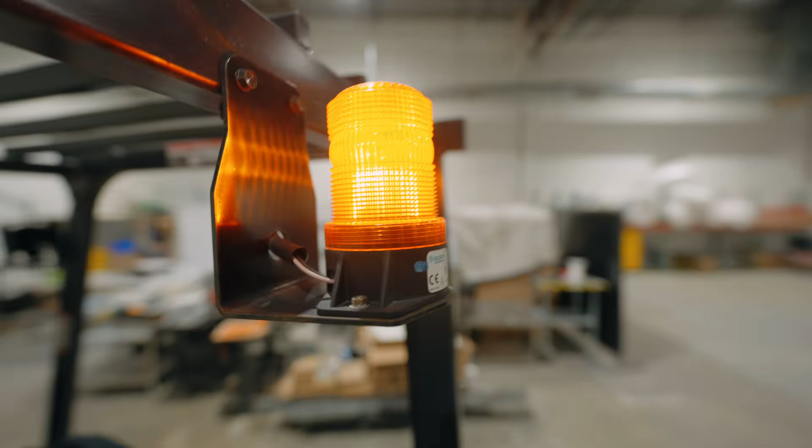I know you really want me to tell you what's in the box. Don't worry, we do have something big to show you.

But before we get into it, I want to give you some updates about our company that I've never shared publicly before. I'm proud to say Formlabs is the largest professional 3D printing company founded since the 1980s. Our revenues have surpassed $250 million per year, and we're one of the only companies in the space that is both rapidly growing and profitable.

More importantly, our customers use their printers a lot. They have printed more than 500 million parts. They also love our products. We have a Net Promoter Score of 60, which means they recommend Formlabs at a similar rate as companies like Apple and Tesla.

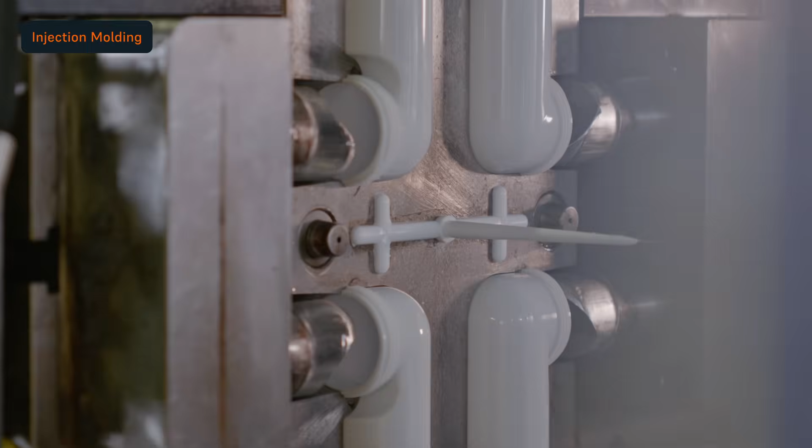Formlabs' mission is to build the tools that make it possible for anyone to bring their ideas to life. But we need even more powerful tools that can match your ability to imagine products. Injection molding is incredible. It can produce amazing parts with great surface finish and detail, excellent materials, and at very low cost at volume.

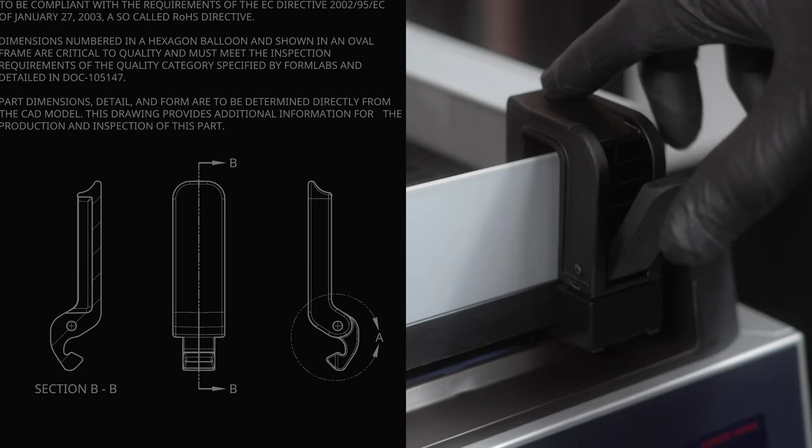But anyone who has tried to make something with injection molding knows that it also really sucks. Consider the humble Form 4 mixer latch. It took us 3 months of tooling iterations and thousands of dollars to produce. Why? There must be a better way.

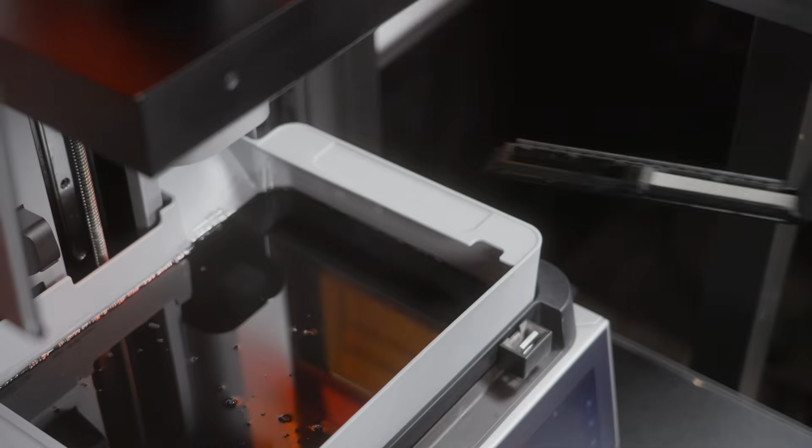We made progress on fixing this with SLA. It's now cost competitive, up to around 10,000 parts, while maintaining the ability to quickly iterate on your design. And we've closed the gap considerably on materials.

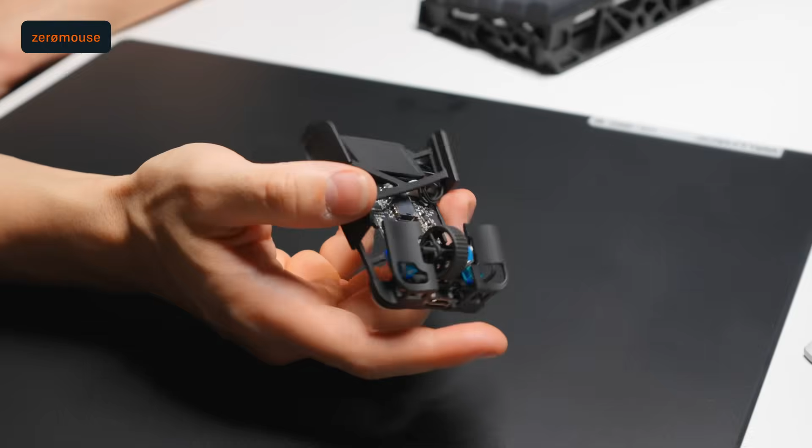Take Ali Syed, an amazing product designer who's using Tough 2000 resin for his lightweight gaming mouse to boost durability and performance. He's printed thousands of this design and shipped them around the world. Our latest generation Tough resins have made a huge leap. Usage has more than doubled already in just a few months.

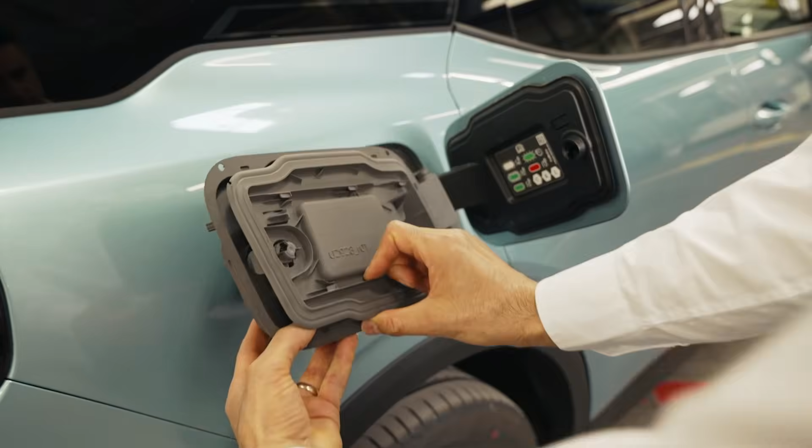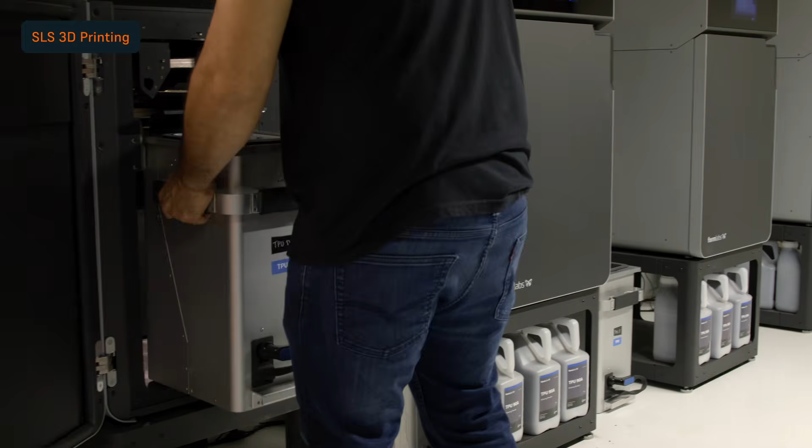All of that changes today. Now let's see what's in the box.

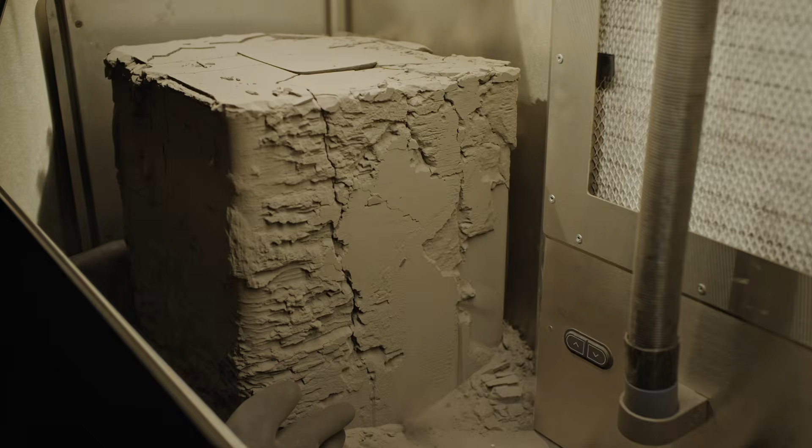I am incredibly excited to tell you more about our new SLS printer, the Fuse X1. Starting your first job on an industrial printer is usually a multi-day affair.

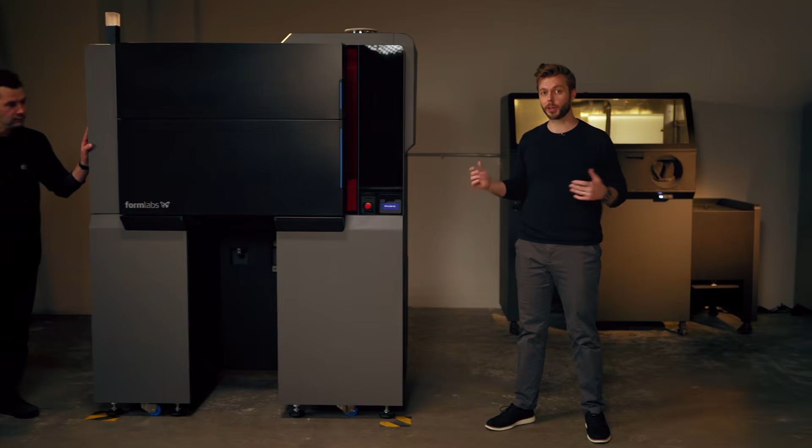30 minutes ago, the Fuse X1 was in a crate. Now it's unpacked and wired, and in just 15 minutes, Peter will have it ready for its first print. He's rolled it through the door and into position, and he'll start with raising and leveling the printer.

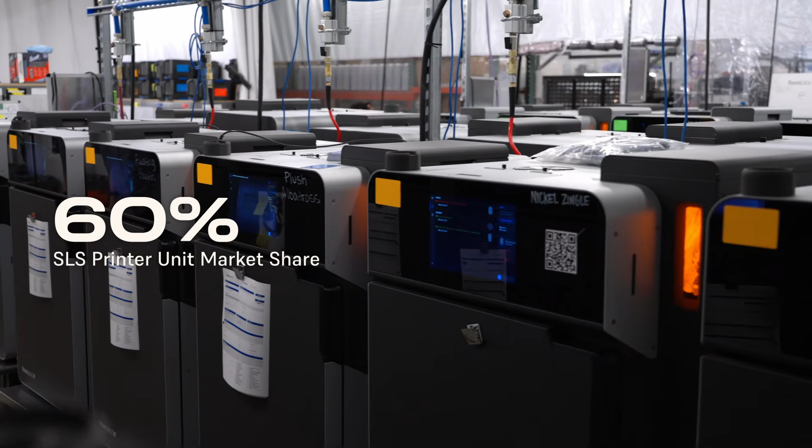Now, let's back up a little bit. The Fuse One series was our first foray into SLS, and it dominates the market today in units sold. But our thousands of successful customers have one consistent request: make it bigger. And today, we've delivered, and so much more.

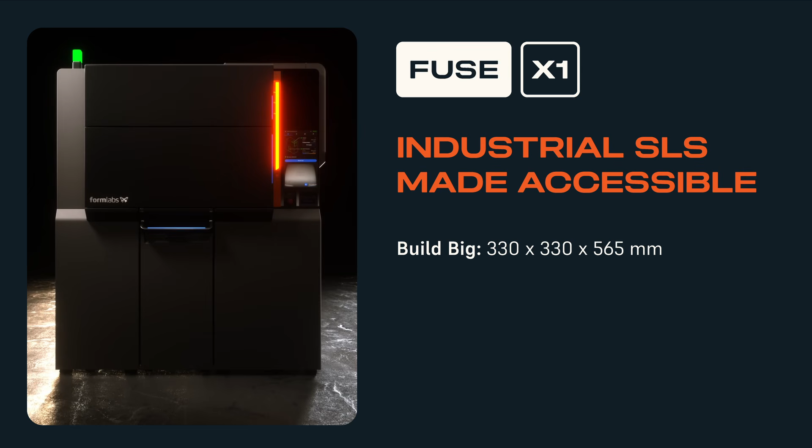We've gone way beyond big. The X1's build volume is huge. It delivers the lowest part cost in the industry. It redefines productivity. It's intuitive, like any Formlabs product, and extraordinarily reliable.

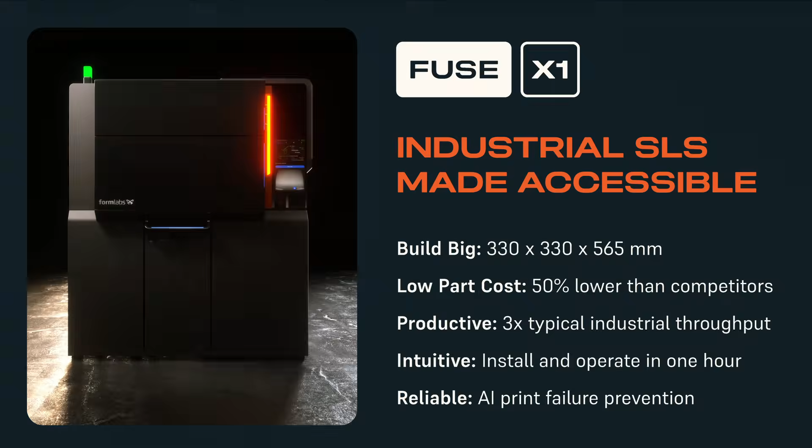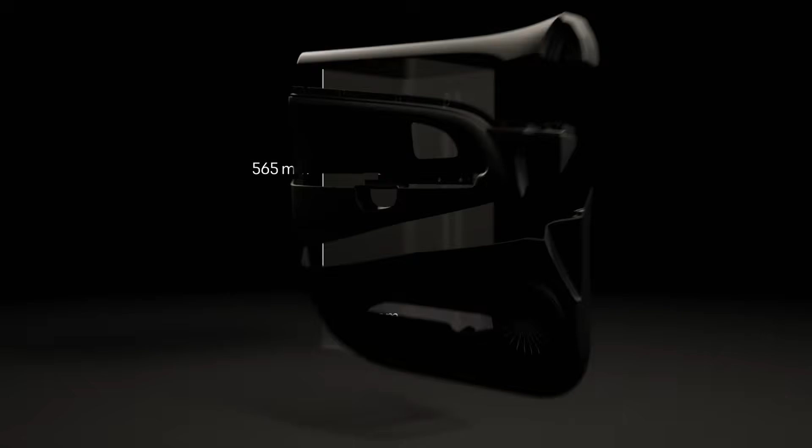Let's talk big. Support-free printing lets you take full advantage of the Fuse X1's massive build volume. That means you can print large, full-scale parts in a build volume nearly 8 times larger than the Fuse One Plus, and dense production batches in the thousands. Let me give you a few examples.

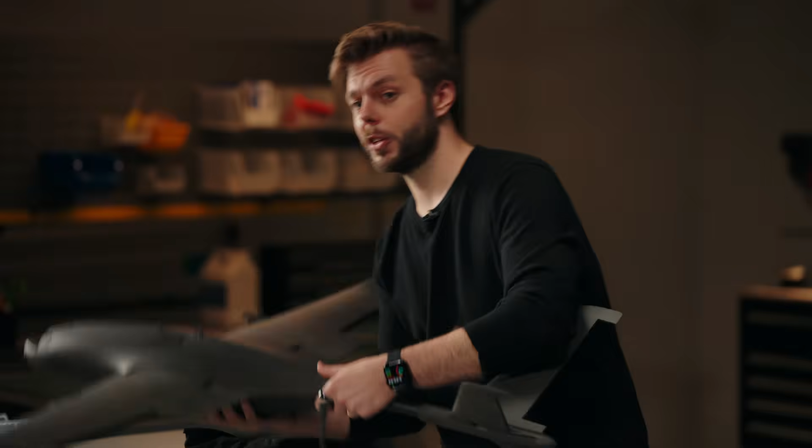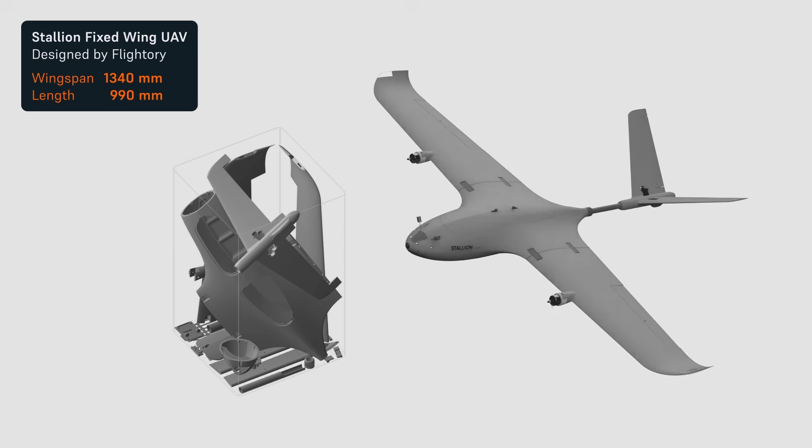Take this huge fixed-wing drone. On any other printer, this would have taken 5 or 6 builds. On the Fuse X1, just one. A 1.34 meter wingspan and every part required can be packed and printed in a single build in less than 24 hours. Same goes for this massive intake manifold.

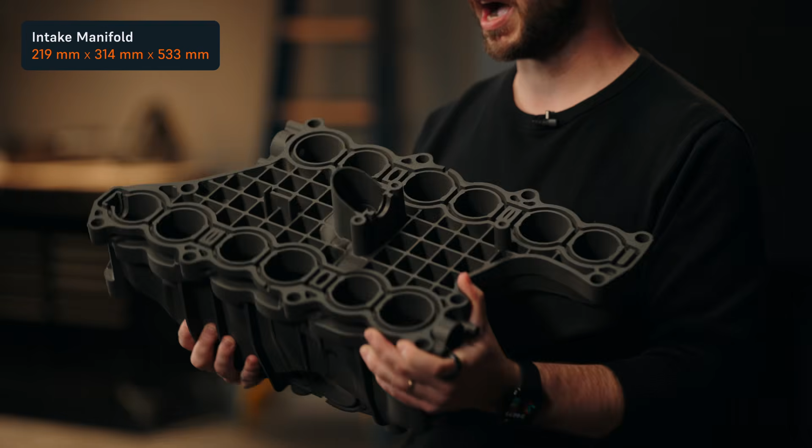The Fuse X1's ability to produce exceptionally high quality, dimensionally accurate parts like these is why Radio Flyer chose it to develop their latest e-bike.

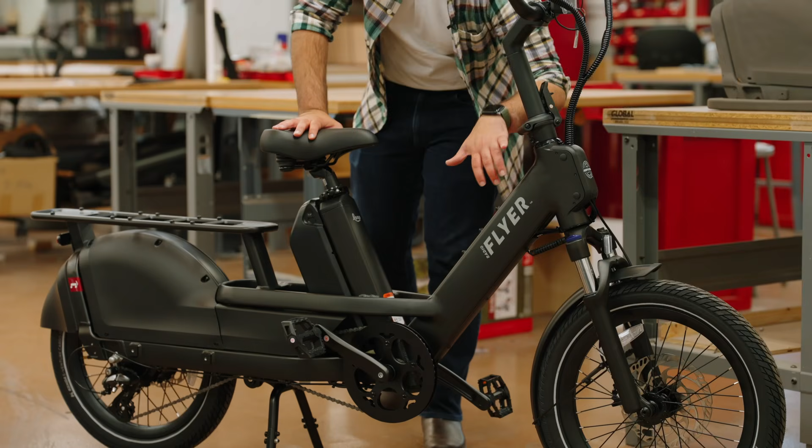The Loop cargo bike is the most approachable, compact cargo bike for families. Our frame is totally custom, our accessories are totally custom, and very intentionally designed. Going back a couple of years, we would have built a full cargo bike with a welded metal frame and then clad it with printed parts.

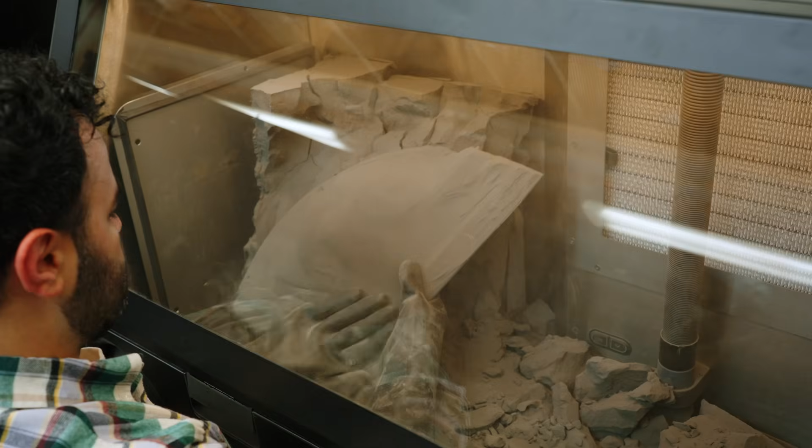We might split it up into about 19 different builds for something like the Loop. That whole process could have taken us 1 to 2 months. With Fuse X1, we could print an entire Loop cargo bike overnight and be gluing it together the next day. So we went from 2 months to a couple of days. I can iterate 3 times as often with 9 times less labor. That's a super appealing value proposition.

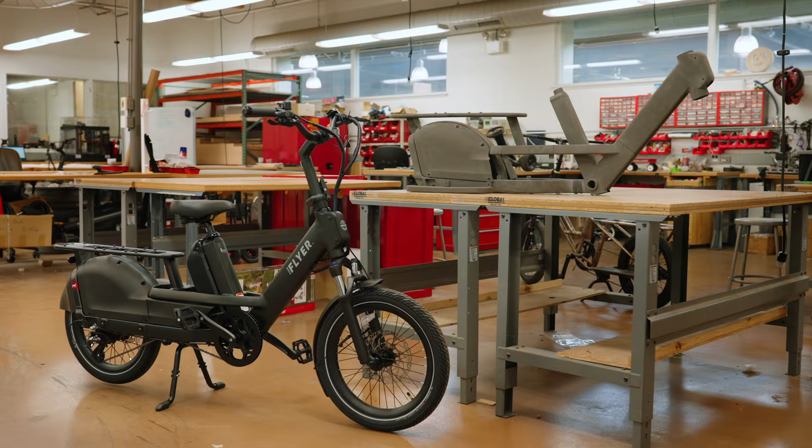Radio Flyer has gone from waiting days or weeks to iterating overnight. They're now shipping more products to market faster than ever thanks to the Fuse X1.

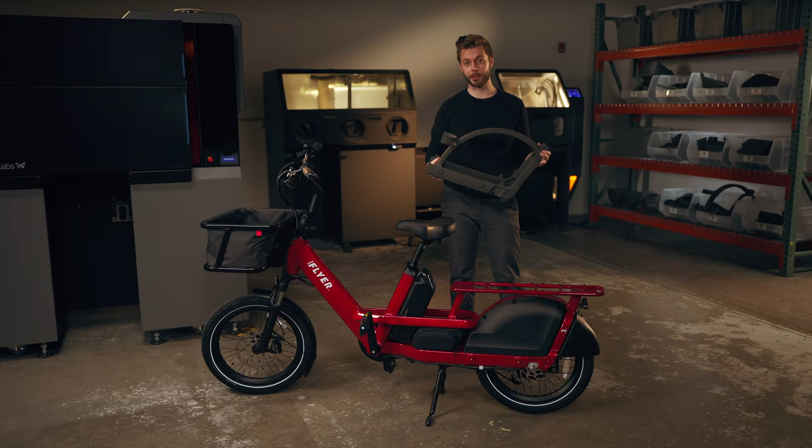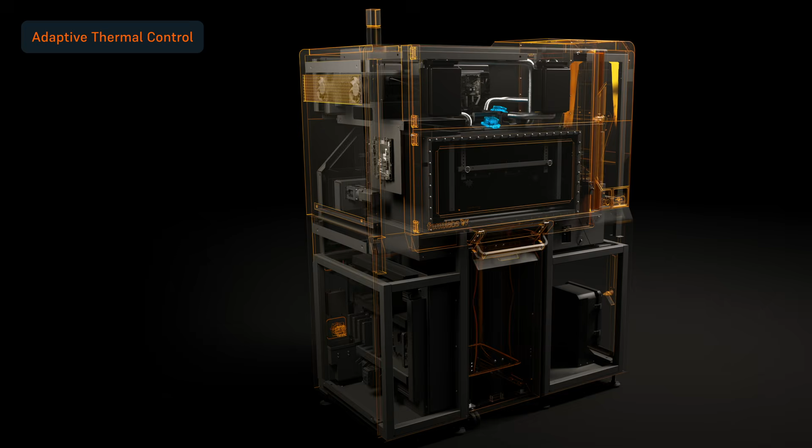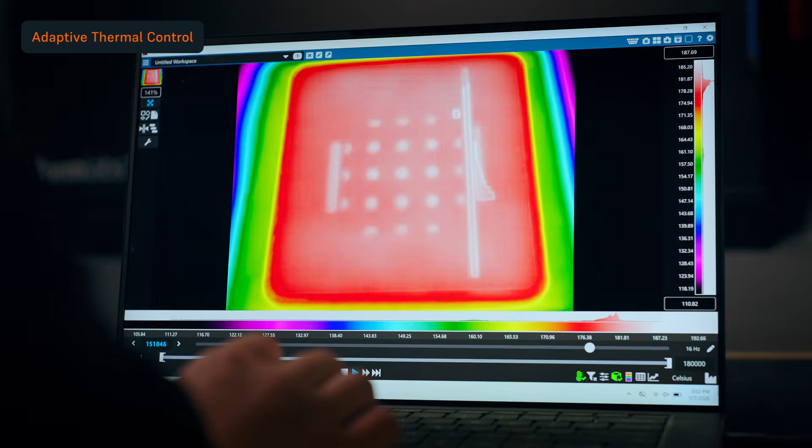But a larger printer doesn't just mean big parts fast. The Fuse X1 sets a new benchmark for productivity. It can reliably print builds so dense that legacy systems will outright fail or produce unusable parts. We achieve this with a technology called adaptive thermal control. With 13 independent thermal zones using 700 times more thermal data than the Fuse One Plus, the Fuse X1 delivers, maintains, and sinters powder at an incredibly stable temperature, giving you unlimited freedom and exceptional part quality.

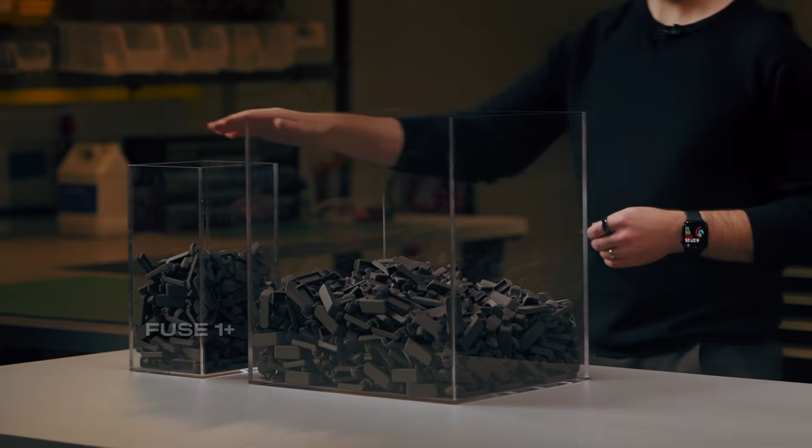Take this Form 4 mixer latch. In a Fuse One Plus, I can fit about 300 in a build. On a legacy industrial printer, about 800. But the X1, it can reliably fit over 3,000 in a single job and 10,000 in a single week.

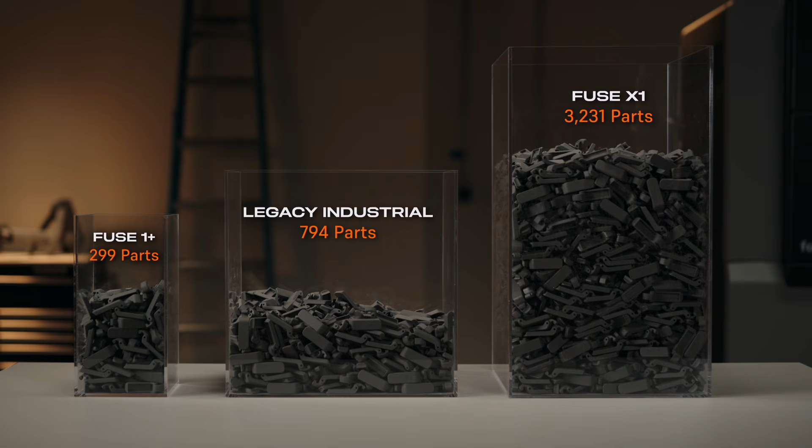As you can see, the X1's build volume is not only larger, but thanks to adaptive thermal control, we can also pack parts closer together and without restrictions on the orientation or the placement in the build. That means you have nearly unlimited packing density.

Productivity like this is changing how the world's most advanced companies develop products and solve problems. And if there's one company that you can count on to push the boundaries of manufacturing, it's Tesla.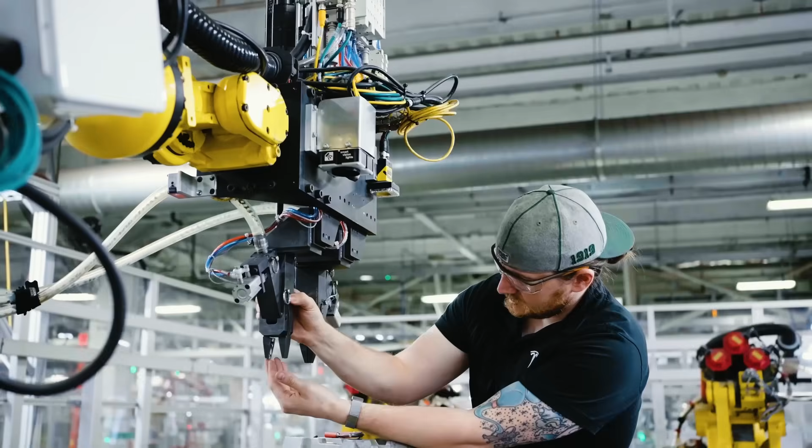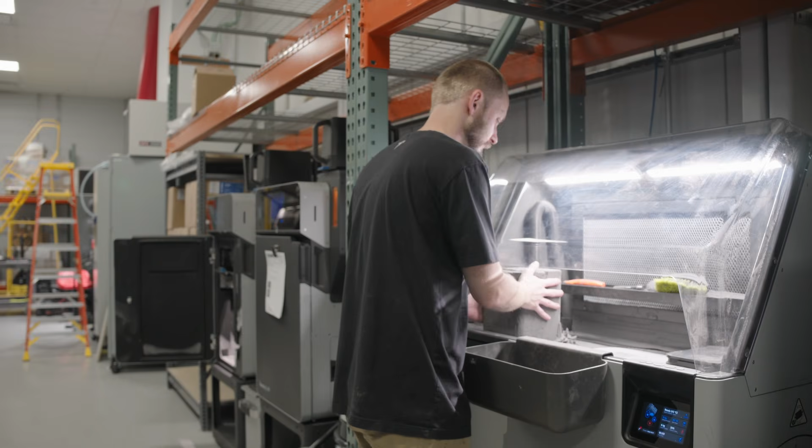Here at Tesla, we make progress on new projects faster than seems possible. We set impossible deadlines and then somehow meet them. Having in-house additive allows us to print a part, test it, break it, find out what's wrong, print it again with a new design over and over until we get it right.

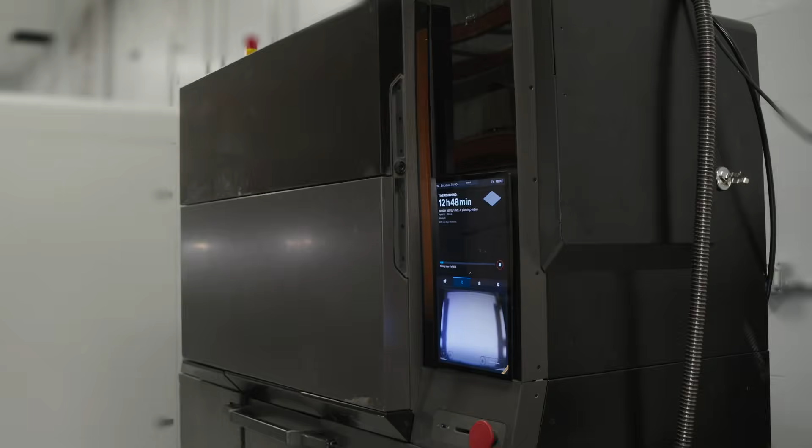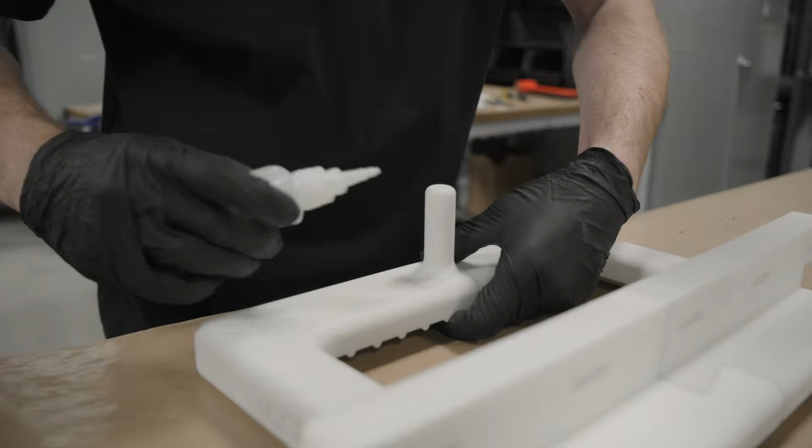So due to the print speed, the Fuse X1 allows us to use the entire build volume within that 24-hour build cadence, which effectively doubles the volume compared to our legacy SLS printers. And then on top of that, the reduction in manual labor.

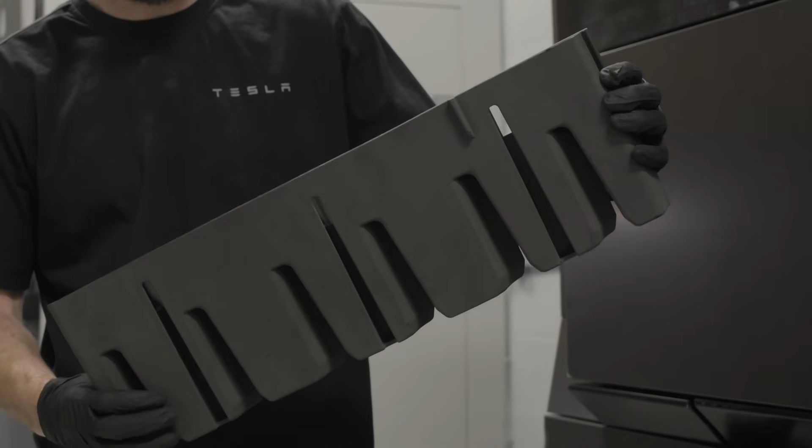Fuse X1 really allows us to run high mix builds with starkly contrasting geometry. So you can have one very large part surrounded by a bunch of little parts with minimal or no impact to the quality of the parts coming out at a very high packing density.

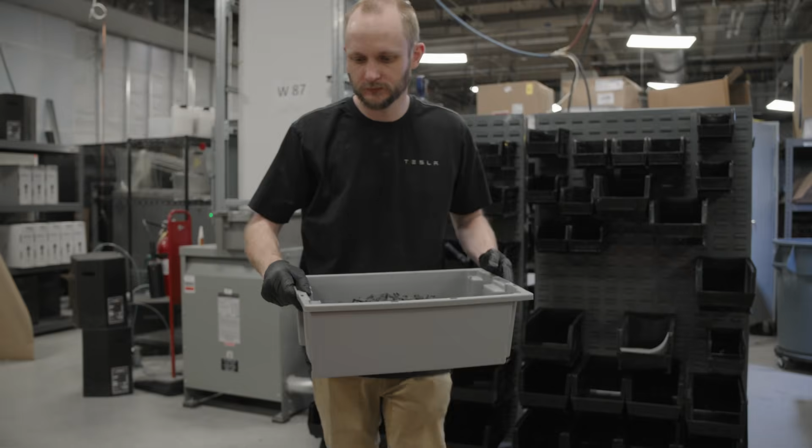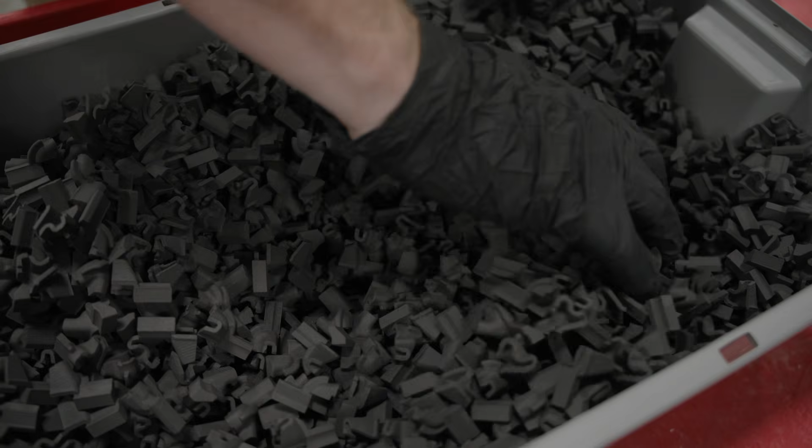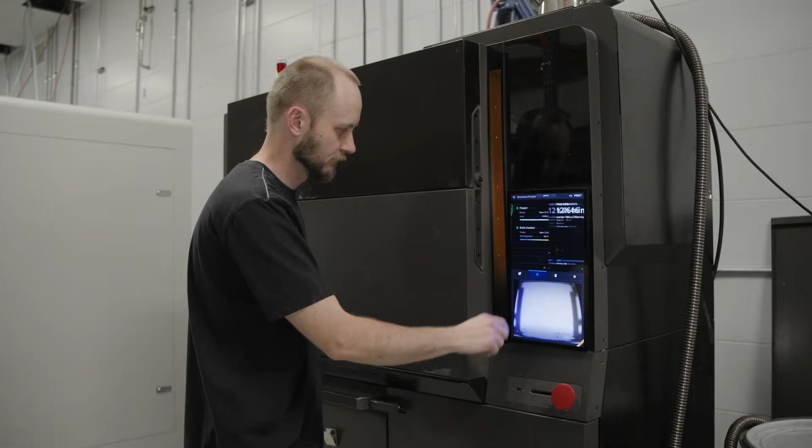With this non-marring shim, we had looked into injection molding and had found that with the SLS systems, the cost per part was competitive enough that getting a mold made really didn't make sense, even though we are going through 10 to 20,000 of these a month. Yet with the increased throughput and decreased cost, it has completely changed our perspective on what kinds of projects our lab can support versus what we would have traditionally moved to an injection mold.

Throughput only matters if the parts are usable. The Fuse X1 consistently produces exceptional parts, more reliably than any SLS printer on the market, thanks to our new AI-powered print failure prevention system, Print Intelligence.

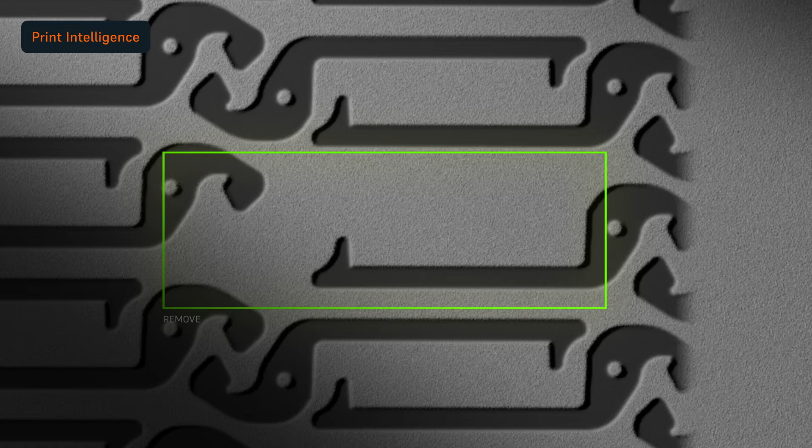Print Intelligence detects part defects in real time. The failure is isolated and selectively removed from the following layers. The rest of your parts print as normal, so you get great parts on time, every time.

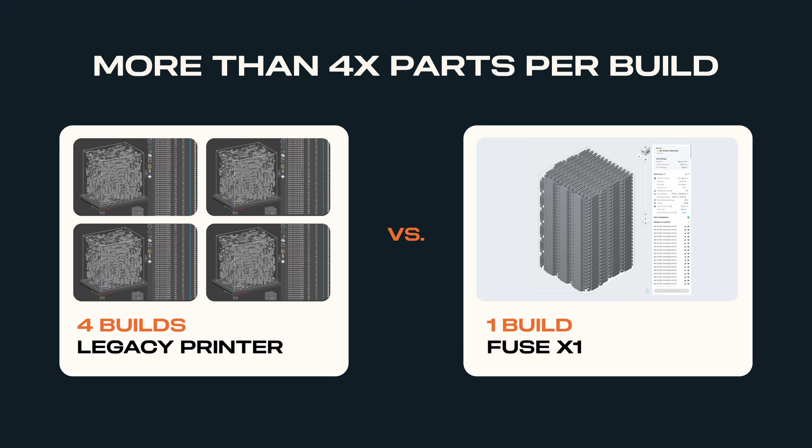The Fuse X1 can produce 4 times more parts per build than a legacy industrial printer, all while occupying less than half the floor space. This breakthrough productivity and reliability makes the Fuse X1 the most profitable SLS printer ever developed.

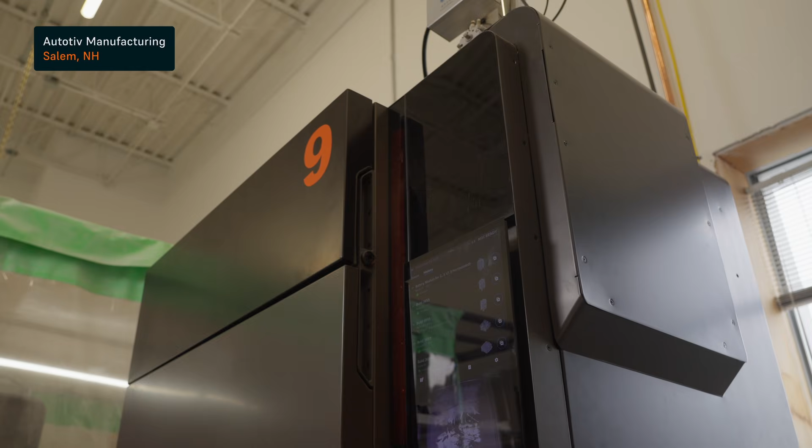For the last 4 months, Autotiv Manufacturing has been using the Fuse X1 to deliver thousands of parts to customers all around the country. The Fuse X1, it's our 5th SLS machine and by far the most productive. The sheer speed is extremely impressive.

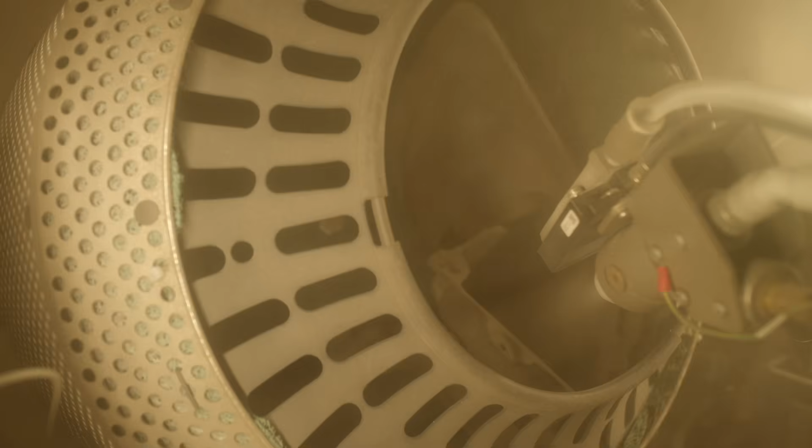It requires very little floor space compared to our other industrial SLS machines. And yet, on a dense build, it delivers more than double the throughput. Other service bureaus running legacy platforms are stuck with build times that are 2 to 3 times as long.

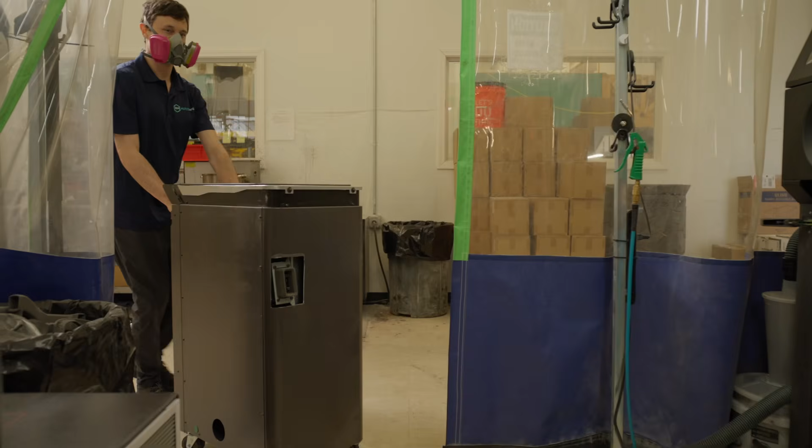The Fuse X1 is able to deliver its massive build volume every 24 hours. This means that you're able to produce giant parts, thousands of small parts in a single build every single day. It's a game changer for the industry.

Our customers are proof that the Fuse X1 is the most productive, reliable, large format SLS printer ever designed. But we didn't stop there. The Fuse X1 runs on single phase power, fits through a standard door, and requires zero facility retrofit.

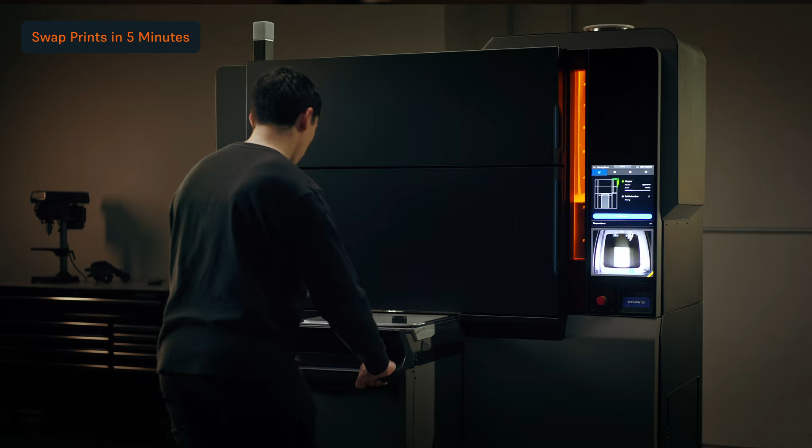Print changeovers take 5 minutes or less, meaning no dedicated operators are required. It all starts in Preform, our industry-leading print preparation software.

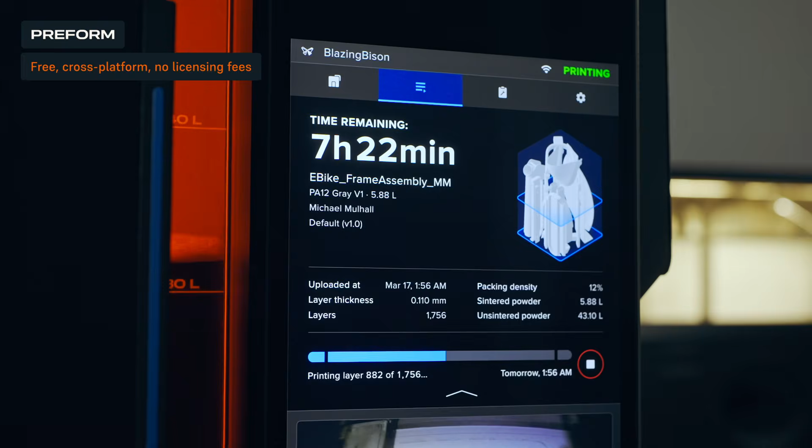Industrial printer customers pay tens of thousands of dollars every year to start a print. Preform is free. Packing and part orientation can be handled with a single click, and jobs can be easily sent to the printer over a network connection.

Looks like Peter's finished the final setup and the printer's powered on and ready to go. All that we need now is a build unit to start our first print. Thanks, Peter. Now we have everything we need to start our first print. We'll take this clean build unit and just roll it in.

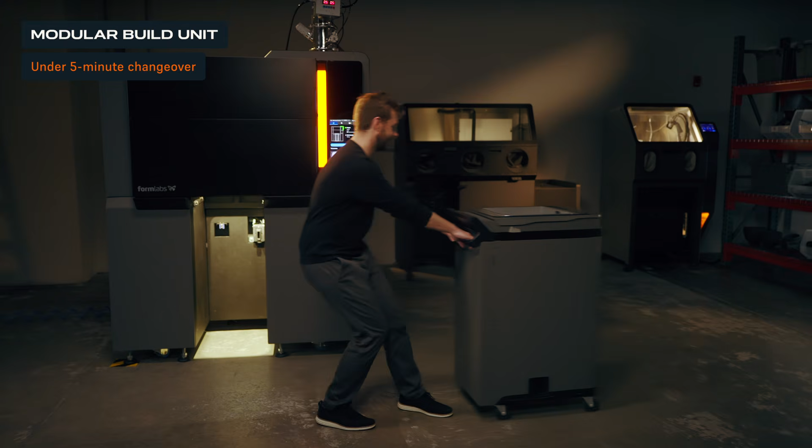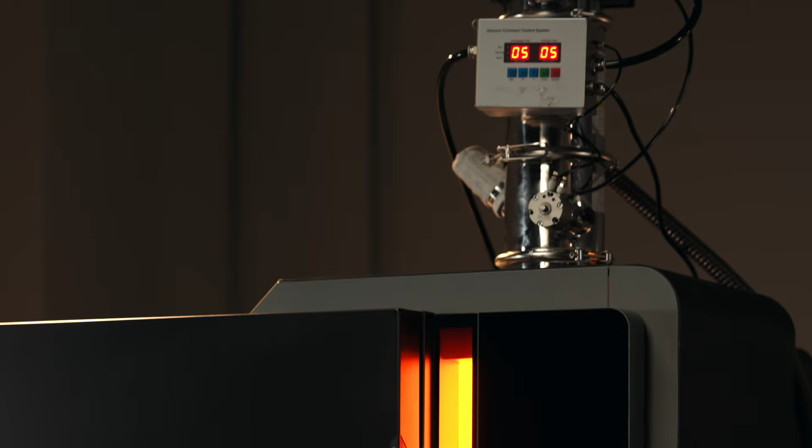It's easy and intuitive with a quick connect interface. We load material with the automatic powder transport system, which conveys material to the hopper. Integrated powder sensing will monitor your material level while the hopper continues to fill during the printer startup routine. From here, I can just press print.

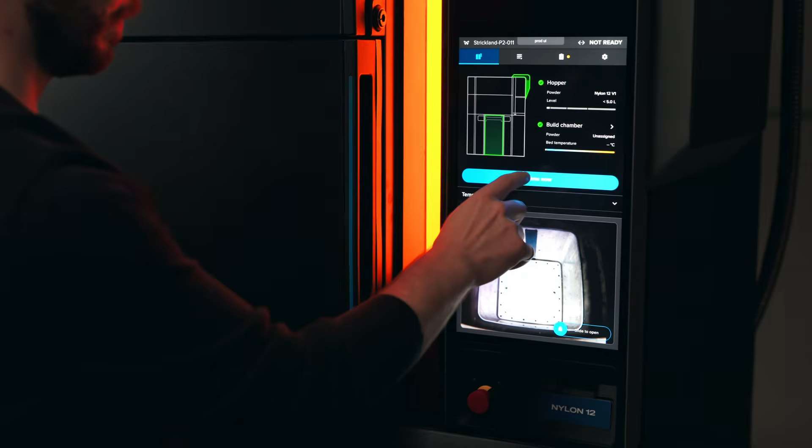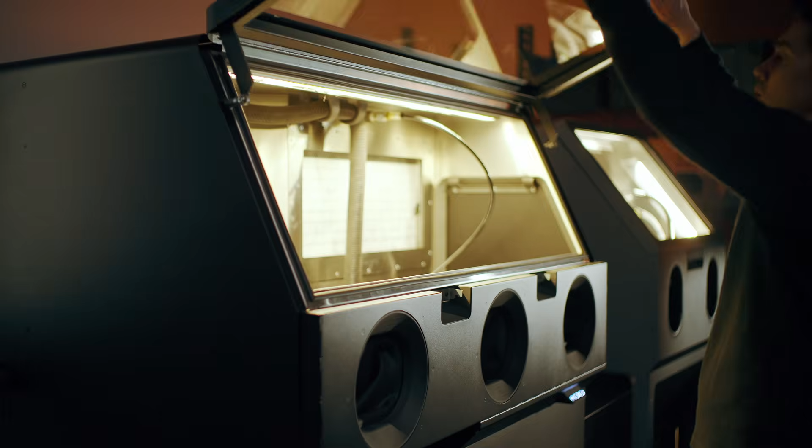Today, we're also introducing the Fuse Sift, redesigned from the ground up to handle back-to-back massive builds without constraining your throughput. It's high capacity, fast to break out, and clean for maximum production efficiency.

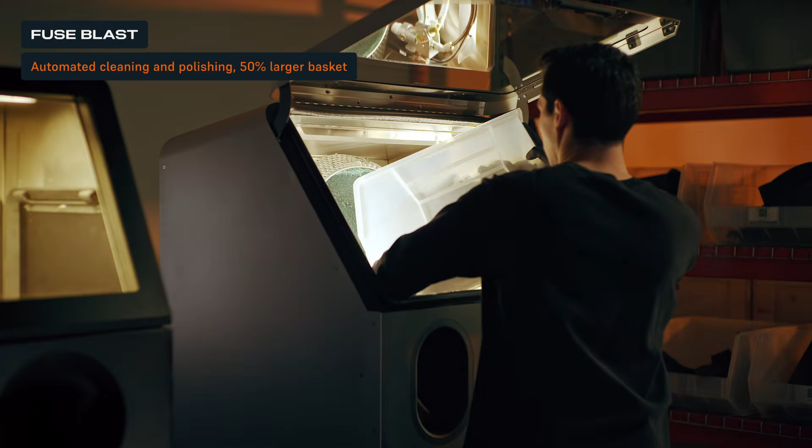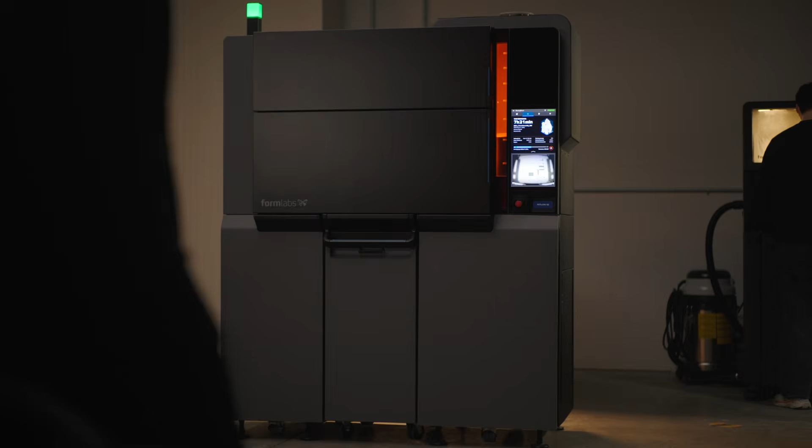Part cleaning and polishing is still handled automatically by the Fuse Blast, now featuring a 50% larger basket, easily removable to manually clean large parts. From design to finished part, no dedicated operator, no specialized training, and virtually no downtime between prints. This is the Fuse X1.

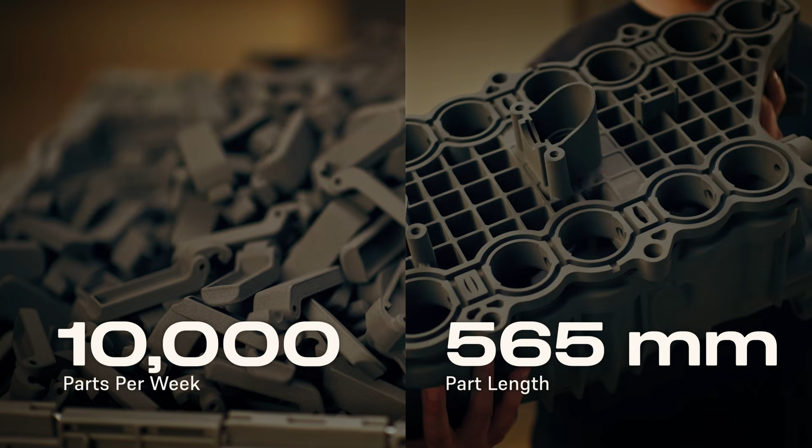So, what does this all come out to? If you wanted to print over 10,000 parts a week, and you also wanted to print a performance nylon part that's over 500 millimeters in length, what would that cost you today? These capabilities from any other vendor would cost you over $1 million.

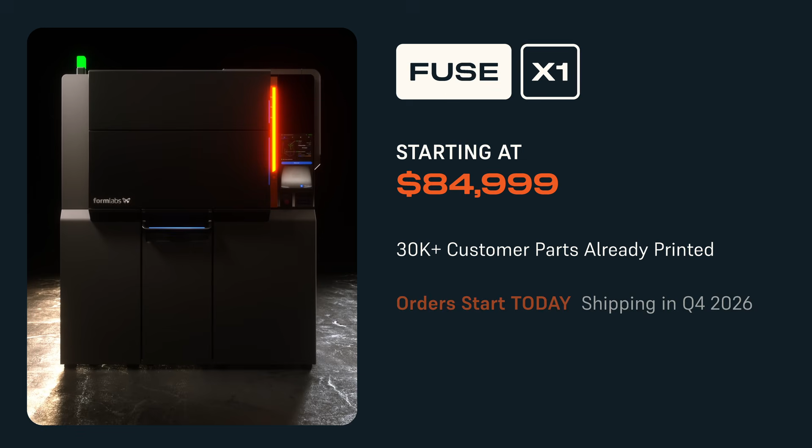But our mission is to build the tools that help anyone bring their ideas to life. So, the Fuse X1 starts at $85,000. In the last 4 months, our customers have printed over 30,000 parts using Fuse X1s, and new deliveries will begin in Q4 of this year.

Nylon 12 will be available on day 1, with Nylon 11, Nylon 12 glass-filled, and TPU coming soon. The Fuse X1 is going to redefine manufacturing.

And with that, I'll hand it off to Sharon Sung, our Head of Materials Development, who will tell you about an exciting new SLA material.

I'm excited to share an advancement in our SLA portfolio that stretches what additive manufacturing can do. As Max mentioned, we've made huge progress in our tough materials, bringing SLA resins one step closer to matching the properties and performance of injection molded plastics.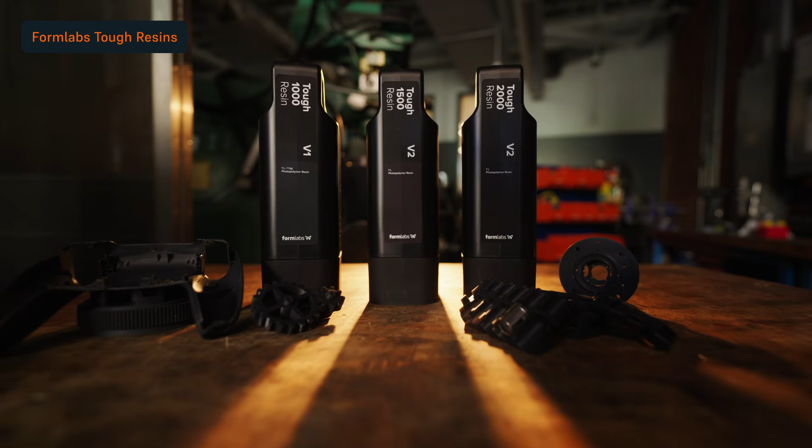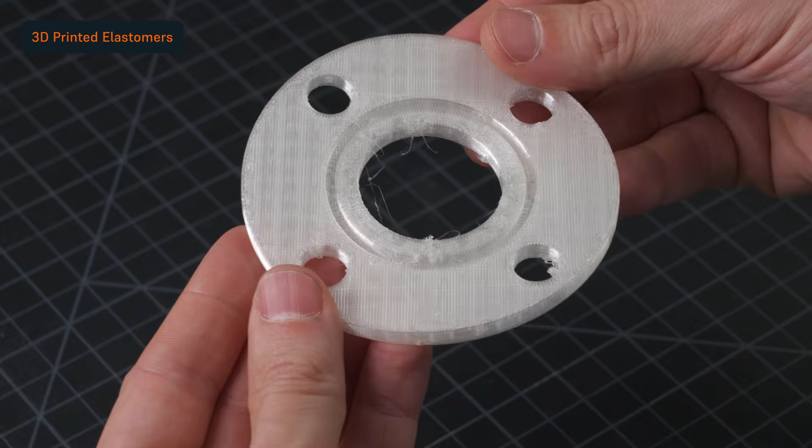However, with 3D printed elastomers, you still face a hard choice. If you have used 3D printed elastomers, you will note that most of them lack tear strength or resilience. Others are impossible to print complex geometries or expire within a day once you start using it. No 3D printed material today has a good combination of performance, printability, and easy workflow.

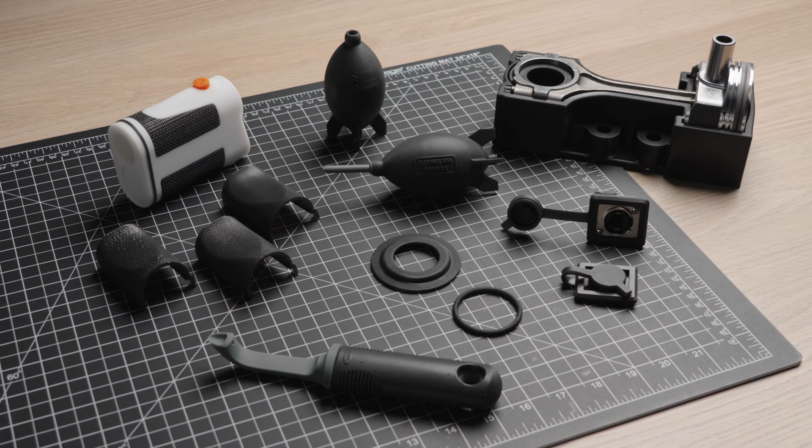This is why we're announcing the new Flexible 80A resin. Flexible 80A resin is a resilient elastomer that matches the look, feel, and function of a cast or injection molded urethane. Let's do a little performance comparison by testing some 3D printed bouncy balls.

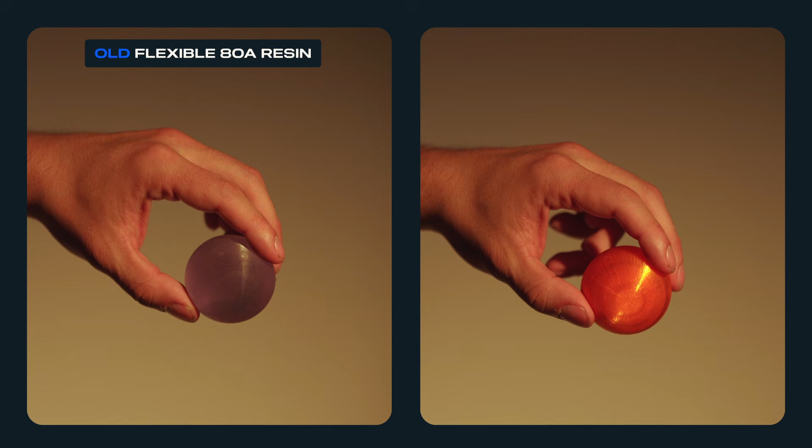I have 2 balls printed in popular flexible materials. On the left is the old flexible 80A resin, and on the right is a TPU ball from a FDM printer. That was pretty sad. Neither of these bounce like you would expect from a real elastomer because they have poor rebound and energy return. These materials do not effectively simulate conventional elastomers, making them a poor choice even for prototyping.

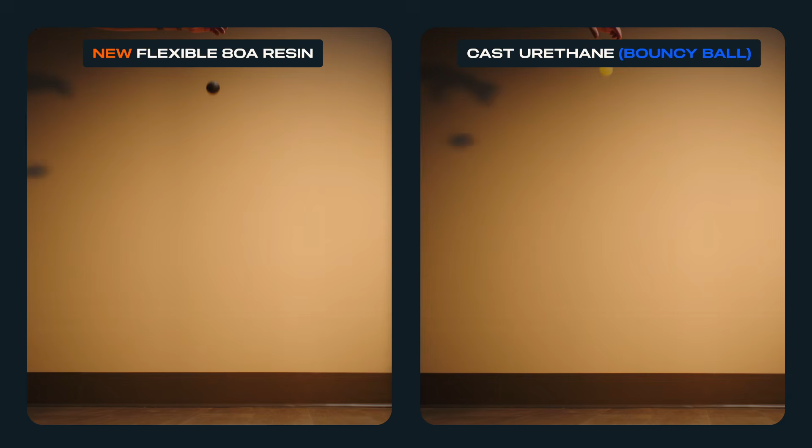Now let's compare the new flexible 80A resin to a performance benchmark, an off-the-shelf urethane ball. With a 56% rebound, the new material's resilience can actually exceed many cast urethanes.

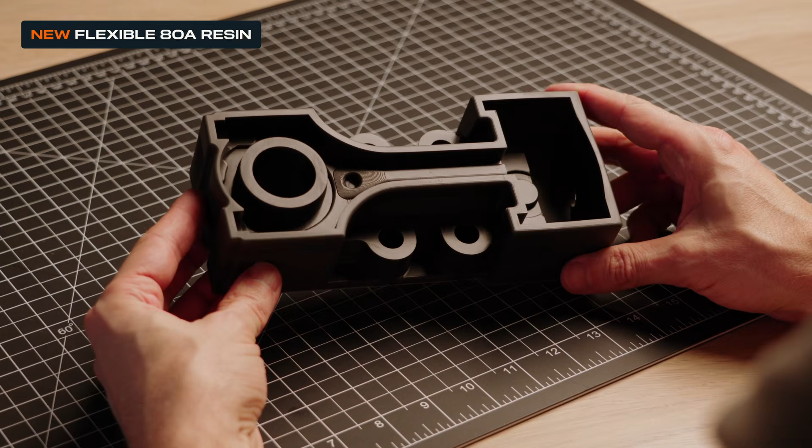But printing or casting a ball is easy. With the new flexible 80A, you can easily create aesthetic, functional parts in any geometry, not possible before with a single part 3D printed elastomer.

Like this dust blower that was completely non-functional in flexible 80A V1. In the new flexible 80A, it snaps back to shape in an instant. Or this full-size airless football that can be printed without any internal supports. Or complex contour parts like these goggles.

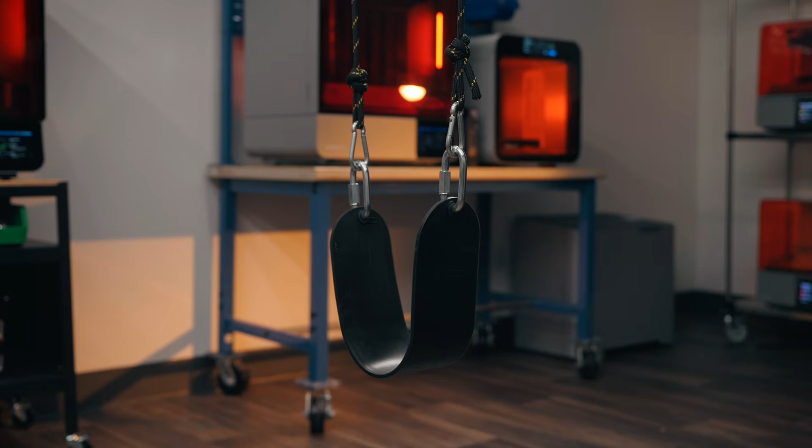But those parts are only useful if they're strong enough for their applications. To test how strong the new flexible 80A resin is, we printed this swing on a Form 4L. Let's put it to the real test. As you can see, flexible 80A resin is strong enough to hold me.

Elastomers, however, are commonly manufactured using a lattice design to use less material and reduce weight. So let's raise the stake by trying a lattice swing that is only 6 millimeters thick.

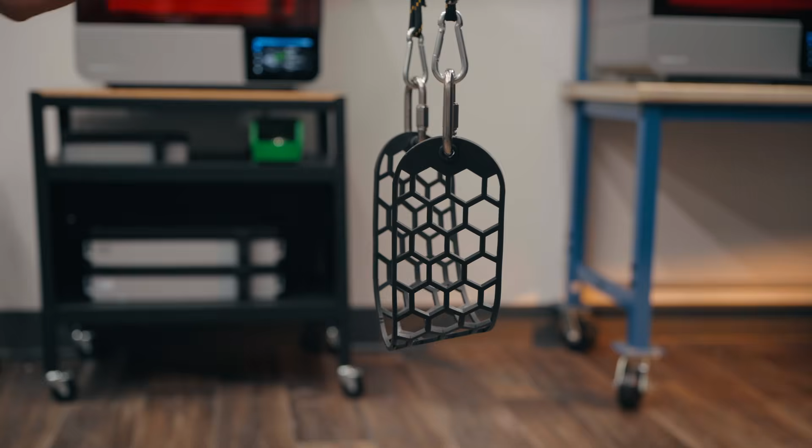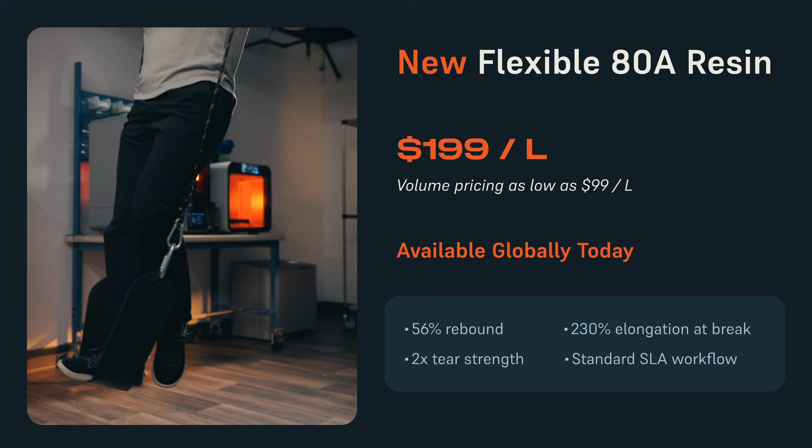The new flexible 80A resin is available now on all Form 4 generation printers, and I cannot wait to see what ideas this material can help bring to life. And with that, I will hand it back to Max.

With the launch of the Fuse X1 and the new flexible 80A resin, we are making 3D printing competitive with injection molding for a much wider range of applications. I know we have something special with the Fuse X1. It's the biggest step towards our mission that we've made so far. Tools that can finally match your ability to imagine products. Let's go make something big.